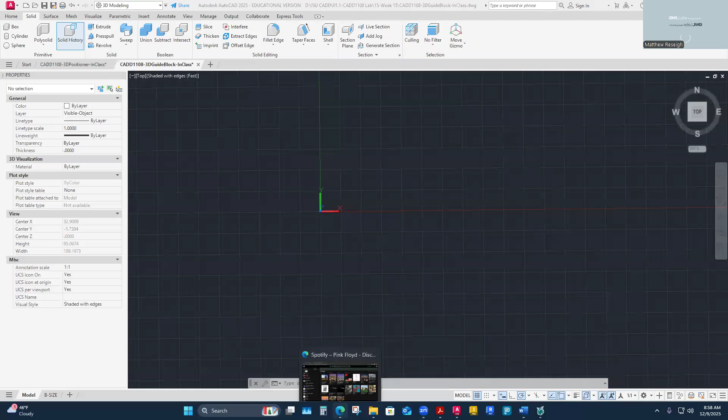I'll go to my dashboard, go to this assignment. Guide blocks, next one.

It's pretty much the same. I do think I'll do a front, top, and right side, and an isometric on this one. I'll lay this one down in its most stable part position, but there's an argument, I think I mentioned that yesterday. There are multiple selections you could do. I think you could kind of orient this one how we did that last block, the positioner.

Let me open my file, let me just open the file that we're working from here.

Yeah, the original way I drew this was I placed this down as the base, as my bottom surface, a nice flat surface. But it doesn't make a very detailed front view though. Everything's kind of hidden in the front view actually. All I'm going to see is this surface.

So there's an argument that maybe I'll change my role here. Maybe, but I think that's how I talked through I was going to do it, and I did it like that last year. But I think based off the way I did that last part, yeah, I would actually have better

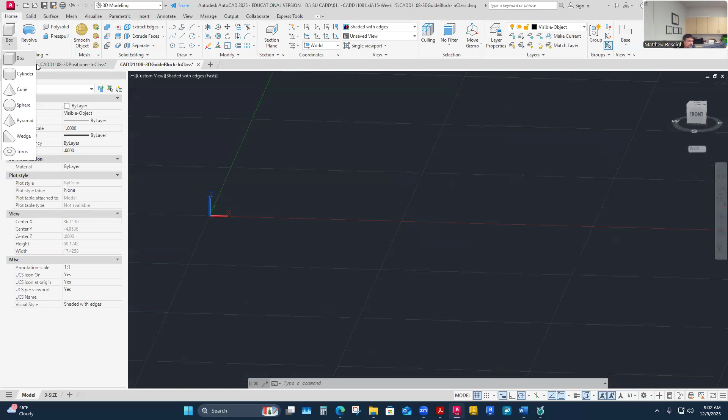I think I can start with that and then do some cutting shapes, but like I said, I think I'm going to do this one that's like 3 inches this way, and then the narrow way this way, I'll zoom in here a little bit, 0.78. Then the height of this block is 1.75, 1 and 3/4.

I'm changing the orientation, yes. For sure the orientation they give you, it's laying down on, like it's probably a stable part position for sure, but maybe it buries everything. It buries that slot kind of. It's stable, but this one's better defined. To me, it just kind of matches that last block I just did in some ways.

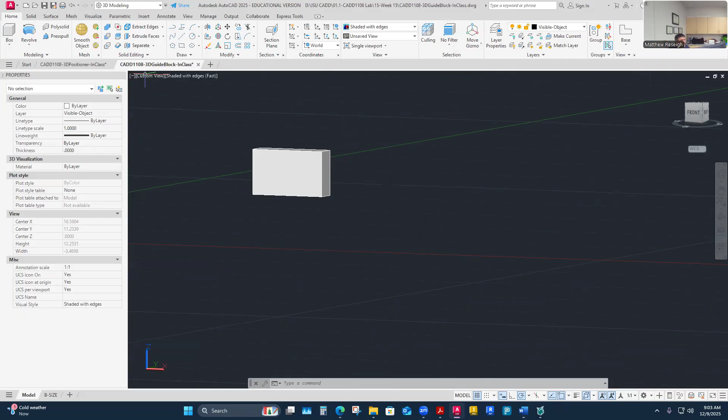Can you do that again? That is not how I thought it was. I'm going to do it. So I would. Well, it's okay if you did. And so, because I think I talked through a different way.

So the other way I was going to do it, I think I talked about yesterday, either one, I'll draw it both ways. How about that? And then you can pick which one you want in your drawing.

But the other way you could draw this is laying it down, so that it's still 3 that way, and then 1.75 this way, and then we have this little thing that's only 0.78 like this. This is going to be my front view. It's not going to be a very defined front view. It'll have the holes and the slot hidden in this view of front, but it'll be a very stable part position.

You'll have our holes here, we'll have the little U channel cut right here. So your front view doesn't show very good definition, but it's super part stable. And I think it's a totally fine way. It's the way I drew it last year, this way.

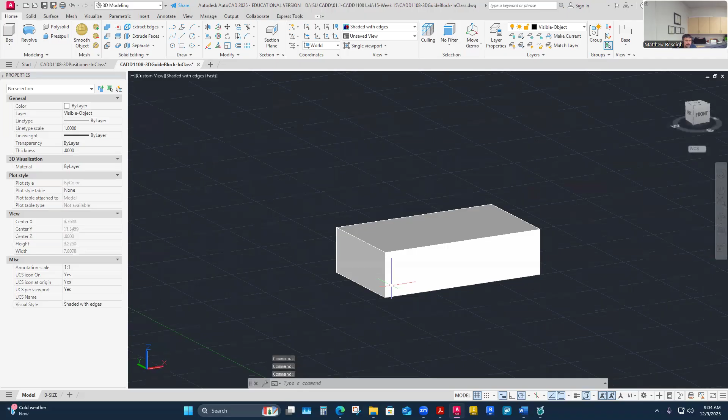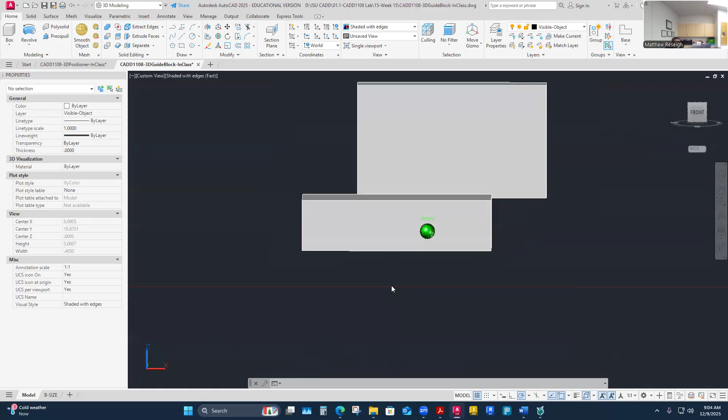I think I would say the best two options though would be this for a front view, or this one for a front view.

And I do generally try to avoid, for the most part, any narrow width front views, because you'd have this really long top view kind of. It's not bad, I mean, it's just you condense your views a little bit. If this is going to be your top view, this is going to be front and top, maybe a little bit more compact view than front and top.

I think drafters would greatly debate this for a while. If you know how the part's going to be inspected, and if it's an inspectable part, then maybe this is the better part position, flat.

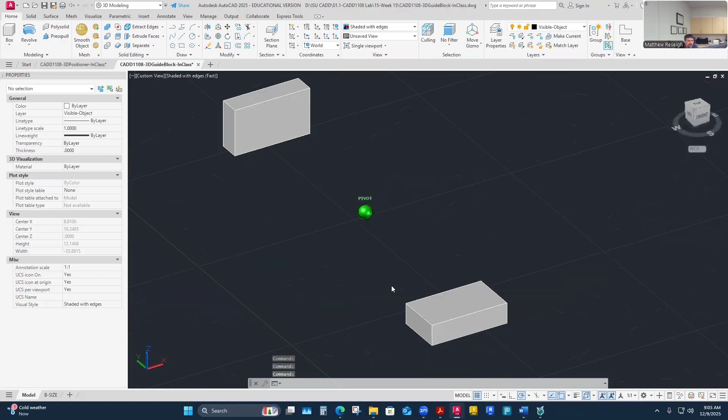But in that other drawing we have here, that would make, if I'm looking at this one, the same thing could be said. But this one shows the best part detail, has the longest width as well. However, it'd be more stable if it laid down on this side. It won't let me rotate that way.

It's really weird. If I laid it down like this though, maybe, so you could make an argument this would have been the better front view. It has some part detail, super part stable, and yeah.

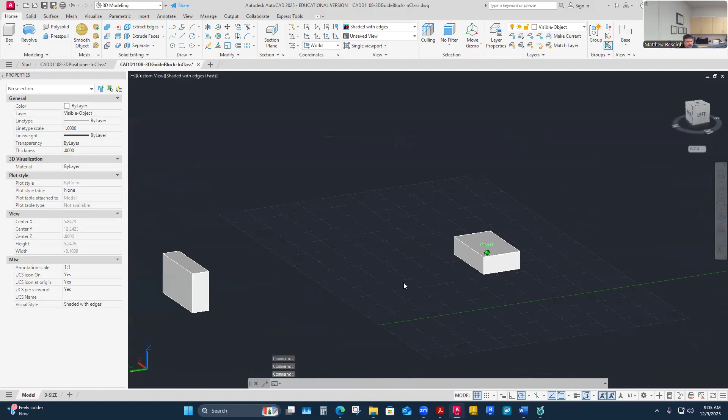So the reason why I'm kind of changing mine is because I drew this one this way. So I'm like, well, maybe I'll consider that concept here, and maybe I'll draw this one that way. Let's spin around. I'm okay with either one though.

Yeah, the biggest thing I'm kind of watching is that this is going to be my front view here, this front view cube. So that's going to be the view that comes in when I go to send this to paper space. It's going to be driven by this being the front.

When we initially place that part on our drawing, we have an orientation where we can change that, so it's not the end of the world, I can always change it later. I can even reorient the UCS in the model space like this. I could move this to be what I want it to be and lock it in on a corner, and I haven't really shown that yet.

It maybe gets a little confusing. Maybe when we get back into GD&T, we'll talk about that.

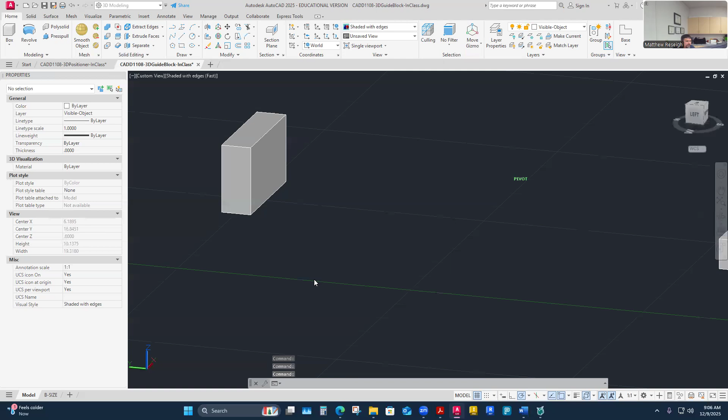But either way, what I want to do is, so I'm going to do this way. If you do this way, it's fine, it's going to be the same features I got to put in this thing. I'm just going to draw the cut that comes through here, and I'll just draw it on this end here. I'll draw it as construction.

So maybe I'll just do a construction line first, up to where I need to go. It's like a half inch up on my drawing, I'm looking at how that's going to be a half inch. And then this width here is going to be 0.75. Don't worry about this nominal size.

There's RC4, hopefully that comes back. But hey, RC-4, something to do with tolerances there, that's the type of class of fit it is, it's an RC-4 class of fit. We don't have to worry about that on this particular one, I'm just going to worry about dimensions only on this, so you don't have to include this either. So I'll just go a half inch and then 3/4, and then it's 375, 372. Oh, they threw a fractional dimension there.

This fraction does not look correct to me, right? That's like an improper fraction. Oh, maybe give the dimension. Oh yeah, it is, it's a limit dimension. You're right, but generally limit dimensions don't have a fraction bar between them. They're just two dimensions, so that's kind of misleading there. I kind of forgot that it has that on it, but you're right, it is a limit dimension. I'll go to just 375. It's nice, it's a 3/8 dimension.

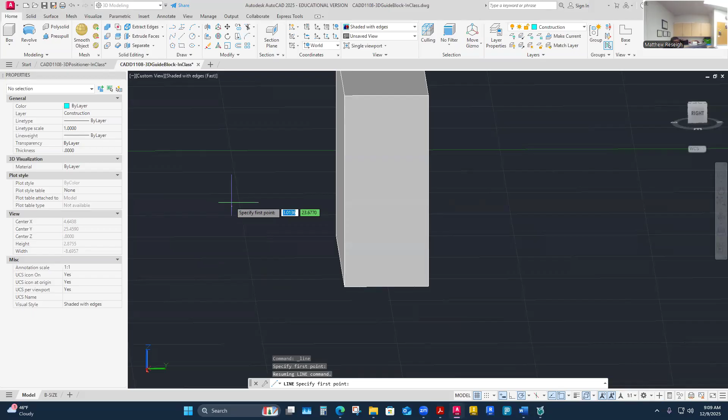I'm just going to do my slot cut this way, so I'm going to come up here like a half inch from this. I got to reference the right... or not necessarily, maybe this is correct, 0.5. Yeah, I got to reference the right face if I'm going to draw this way, right? I got to reference the face, lock into a point, make sure I get the same.

I am on the wrong face. I got to spin that thing out of my way. There we go, I just hid that face so I could get to the right face. Yes, draw up 0.5, that's 0.5 up. And then I'm going to come over this way, 0.375.

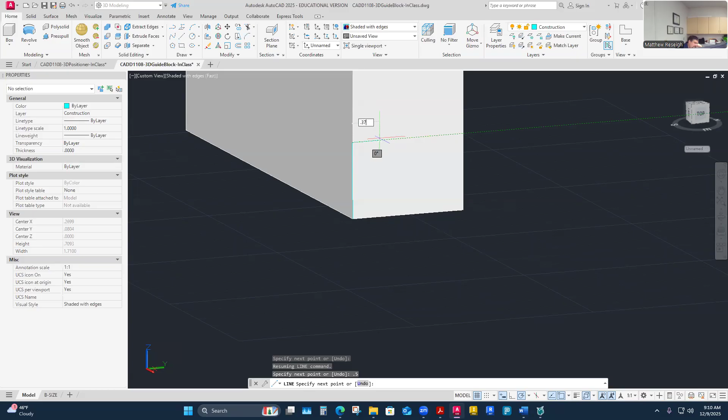And then they're 3/4 of an inch deep, and back to here perpendicular. And then I'm going to close this shape off so I can use it as a cut. Enter, so now I've got that shape. That's not all joined, I think I can still select it as a press pull with just the pieces. Let me try this, I'm going to try to press pull this and cut it through.

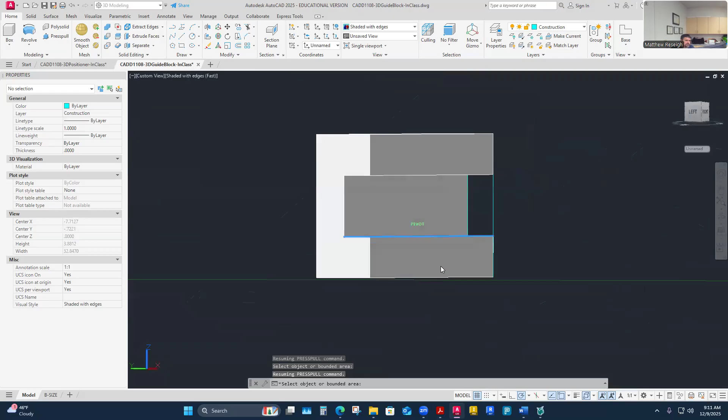It wants to know which... oh yeah, it'll select that one as maybe a boundary. Is that the only one? Yeah, it will, that's good. Even that, I didn't use polyline there, I think I just used line, but it still will recognize that shape as pulling through here. And then I'm probably going to enter a dimension, which is the 3 inch, and then I cut it out. If yours added a solid, that's okay, just do the subtraction.

And then I just got to cut two circles, right? So I'm just going to lay those out probably from the back side here, from this surface. Let me see what those dimensions are. 3/4 of an inch over. And is that centered? I think that's centered then, because it'll be 3/4 inch off each side. 1.5 inches between 3/4 and 3/4 would be 1.5 inches. So this is, yep, these are kind of centered that way.

And then this direction, are they even labeled? They were centered, yes. You'd have to call your engineer and be like, hey, are these centered? Right, right. Yeah, that's true.

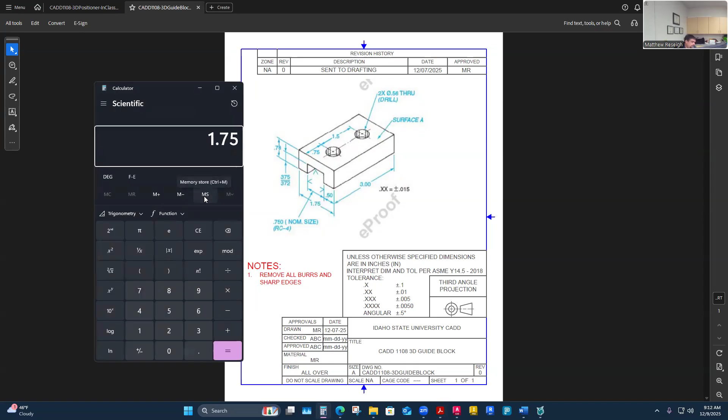I'm gonna assume they're centered too, so that's centered in 1 3/4. That's a half plus 3/8. Is that 7/8? Yeah, 0.875. Half of 1 3/4, when in doubt use your calculator, right? 7/8, 875. Okay, so it doesn't matter which end I come in on my block necessarily.

It's not specific, I can come in this way or this other way. I think I'm just gonna lay out some more lines from this surface though. Yeah, I strategically like roll this around. If I'm going to reference this surface and this other one keeps coming up when I go to here, maybe I'm just going to get it out of my view.

So what are we going up? 7/8, 0.875. I'm just going to draw a line first, 0.75 over, and then another line that's going to be 1.5 over.

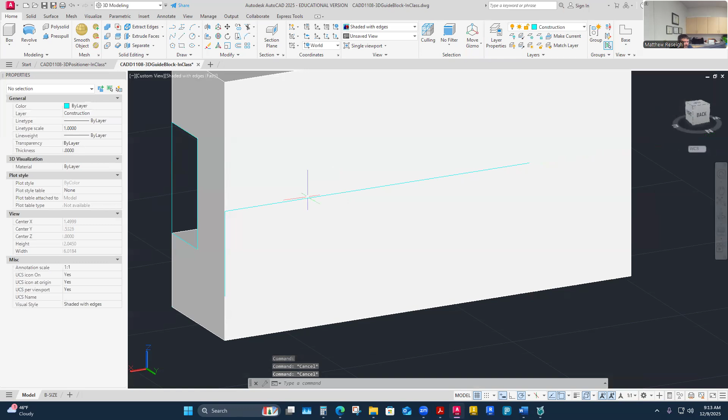So I should have endpoints of those lines now. I've got two segments on this line. This can be hard to see, so I can go over to wireframe and see my individual lines. Yeah, that should have an endpoint, and this one should have an endpoint too. I think I drew them not as polylines, but they'll still have an endpoint there to put a circle through. And the diameter of that, I didn't look, is 0.56 diameter.

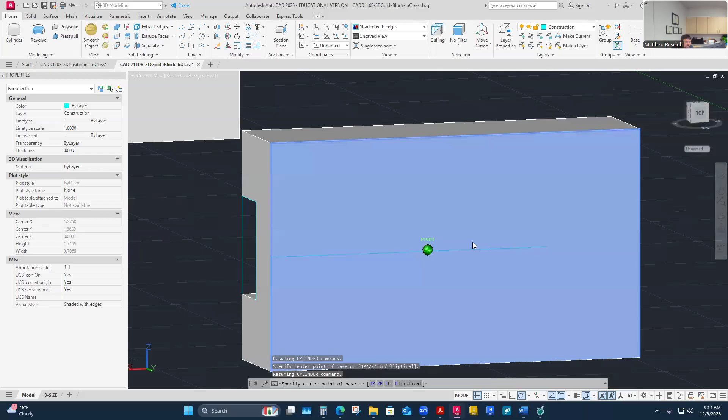You could do a cylinder shape because you have a center point. It wants to know where the center is. I should have a center point on this line somewhere, maybe if I have a grip. Maybe not so good on that. Right there, I think I saw it. Probably gonna be easier to see in this though.

I don't know if I'm going to do cylinder. That should be a solid - this is the difference. I think this will be a solid if I use this center from this. There's my endpoint there, and it wants to know the diameter, which we said is 0.56. Oh, this is radius, right? So 0.56 divided by 2, or we can go diameter. Let's just do that - diameter, yes. 0.56.

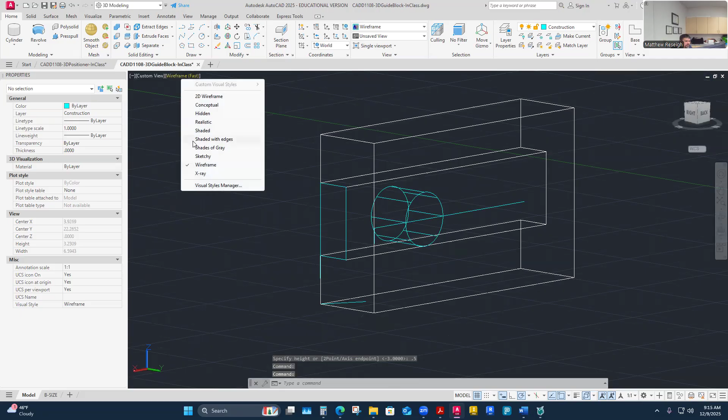And how deep does it need to go? I don't know, it's going to be a cut. This is one that you could cut through. You could look here and say, oh, I'll just cut it a little bit long. If I cut it a half inch thick, it will cut through long like this. But I think this is going to be a solid, let me look. Yeah, for sure these are going to add solids, which is not a problem, right? Just remember you can subtract this one, enter, from this one.

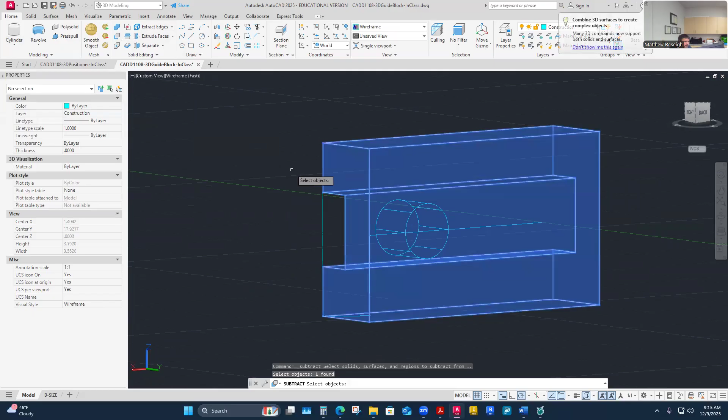Oh, maybe I didn't get it. This could be a little tricky too. I get it on my wireframe. I'm going to subtract this one from this one. Now I've got to cut through there.

And I'll do my other one the other way, which might be just to draw the shape there on that. So if I just draw a circle shape, circle by this endpoint here - or I could have moved that over before I did it, I guess. There's a lot of things I could have done different. There's that one, here's my circle shape on that surface. Diameter, yeah, 0.56. And then I can press pull that shape through this way.

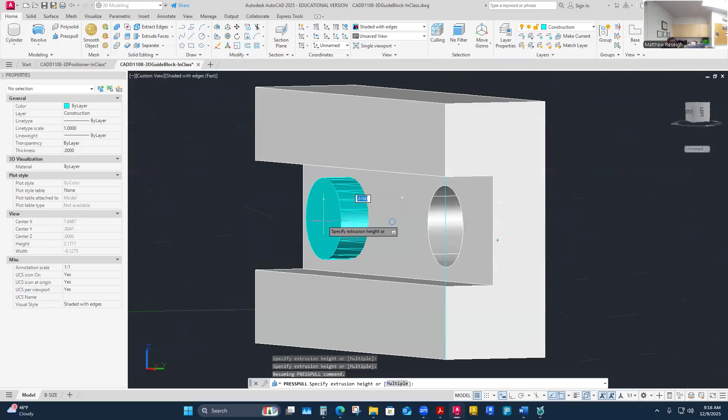Oh, I can go the same distance, 0.5. That should be a cut through. So, done deal. Doesn't have any chamfers or anything - no, I don't think so. And let's dimension that thing out.

So then I'm going to go over to my visible object layer so I don't put it on the wrong layer. I can turn off my construction work. Okay, and place that base view from model space.

I was going to show you this - I have two objects in here, so let me just show you the difference. I generally am going to place them from model space, because if you're on your paper space and you use that same command, you have the same home tab, and you place this from model space, it brings in everything you have here, right? So it brings in the entire model space into the paper space.

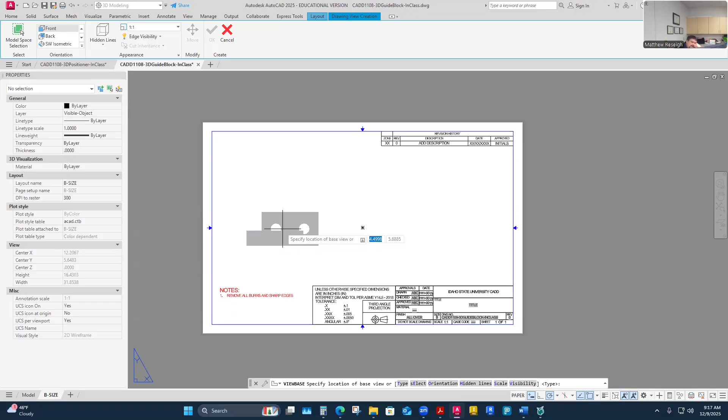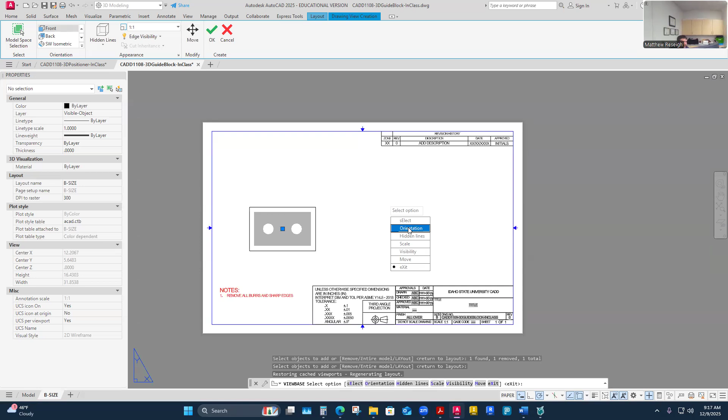Did you go to wireframe? It'll be hard to select some of those solids that are overlapping each other so close. It's one of the reasons why sometimes maybe I'll draw it not on the exact surface, but off the surface a little bit - but I didn't, I drew it right on the surface. But yeah, wireframe is your friend because it'll get into those particular line segments.

I feel like I'm using a shaded view and a wireframe view quite a bit, toggling back and forth between them, just because I can't tell if it cut it or not here. I mean, I think if I used it enough to know, I think I could tell that it is cut, but the only problem with wire view is sometimes you can't tell if you've cut or left or not.

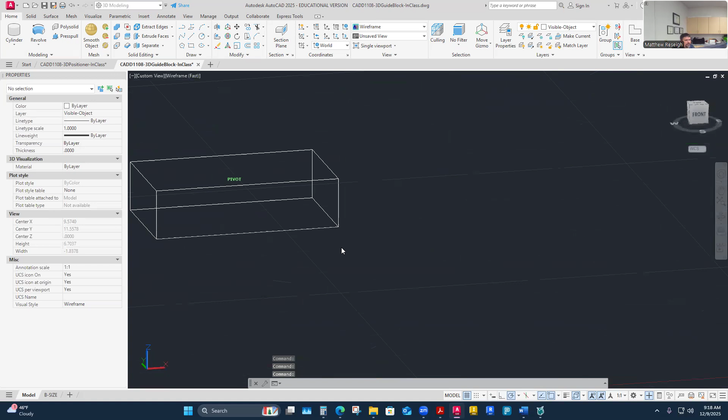So let me see. I'll try to do another cut of these ones if I go back to my shaded with edges.

So did you do a drawing, or are you using the box commands, the solid commands, or are you doing a drawing and a press pull?

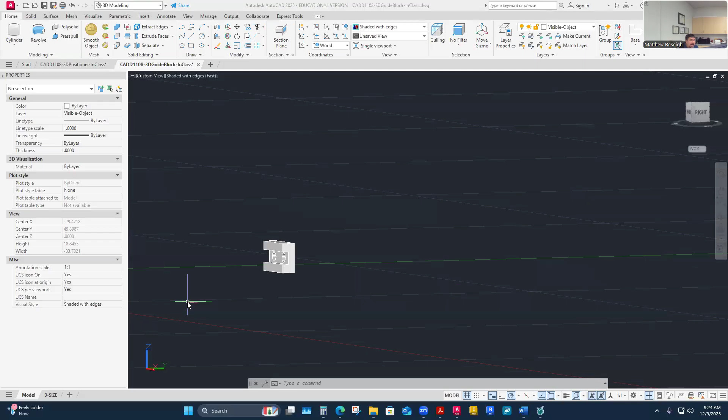Let me resume my recording here. There could be a reason to make a layer to add these to your layout, but what I'm showing you is there's multiple ways to add this to your layout.

So I have nothing on my layout, deleted my viewport, and this is the way I usually add mine to my layout: I come in here and say I'm ready to add something to model space. Even if I have a bunch of stuff here, I just say base view from model space.

It always wants you to select those objects. So in this case, if you had multiple objects like I do, I'm just going to select this one that I want to put on my drawing. And then I hit enter.

Then it's going to say, which drawing sheet do you want? This only really applies if you have multiple drawing sheets, and if you use the arrow keys, you can toggle between which drawing sheet you want to put this on. I'm going to put it on my B size sheet, which is by default what's loading in my cursor anyway. Once I hit that, it just jumps to that sheet and gives me control of this object.

And then it wants you to know this is your parent view, this is your base view. It's also going to come in as the front view. So I kind of selectively chose my front view when I built my object, so it's built in this orientation. There was a little bit of pre-planning.

Oh yeah, it's gonna take a minute to do that. Yeah, you gotta let that load. First time you're using it every day, it's gonna make you do that.

No, because I'll just show a couple more things. This is the way - you just click once, left click to set it, and you get this. You always get this once you set the first view, and this is when you get the orientation change.

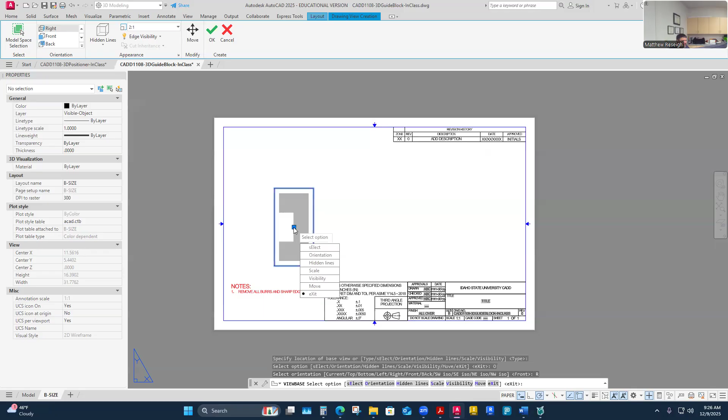Yeah. What am I doing? Just this - I'm just placing this from model space. And I'm hitting enter, and I'm choosing the sheet, which my sheet is just only one. I just hit enter and it goes to that sheet.

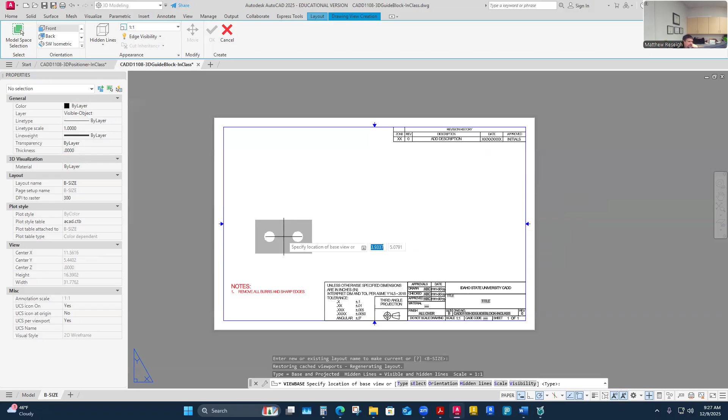And then I just left click. The first thing they want you to do is just place where the parent view is going to go. Mine's going to be kind of the traditional front, top, right side view. It's just that when you get this, this is where you have some control over that orientation to change.

If you don't like how that looks, then maybe pick a different orientation here, which you have your rights and your lefts. You could place it on the bottom, or you could place it on the top here. Sorry, select that one - orientation. But the one that I want is my front, because I drew mine in the front view.

The only thing you can never really get back to is the orientation on the parent view, I think. The rest you can always get back to. So if you don't have the scale right now or the line types correct, we can come back to this. This is just editing the view later, and to me, it doesn't matter too much.

You can hit exit, and then it goes into placing those other views. So I don't know, with this orientation, I probably can just get away with a front and right side view, honestly. If I do the other orientation where this was my front, then I probably do need to place the top to define the slot details.

Here, I think I'm okay. I just need the isometric view as well here, like this. I'm just left clicking these, and that's just placing them. And then when I'm done placing views, I just hit enter, and then they're going to show up. I think default's going to be show the visible and hidden lines.

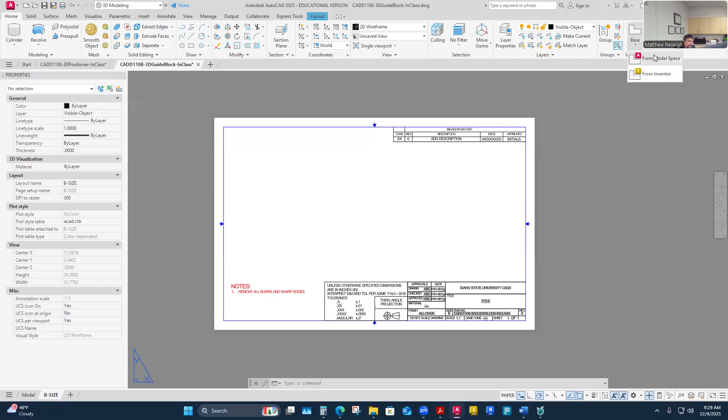If you place these views while on the drawing sheet and use that base view setting, by default it's going to bring in everything that you've modeled in model space, which if you've only modeled one thing, it's not the end of the world - you can just bring it in then. But if you have multiple things modeled over there, it's going to bring them all in, everything, kind of in that same view style.

Once I place that view, I can go to select and jump back out. And you can see that by default it's selected, and if I would have had a bunch more drawn, it would have selected everything. So I'm just going to hold down shift and select this - that's how you deselect stuff from a selection. Hold down shift, select.

And then I just hit enter and it will be only that one object now. Even if you go the other way, you always have the select menu up, so you can always choose to - even if you didn't get everything selected right to detail how you want to do it - you could hit any of these views. Select is another option that you can always get back into, and you could reselect stuff that you did want to detail on your drawing.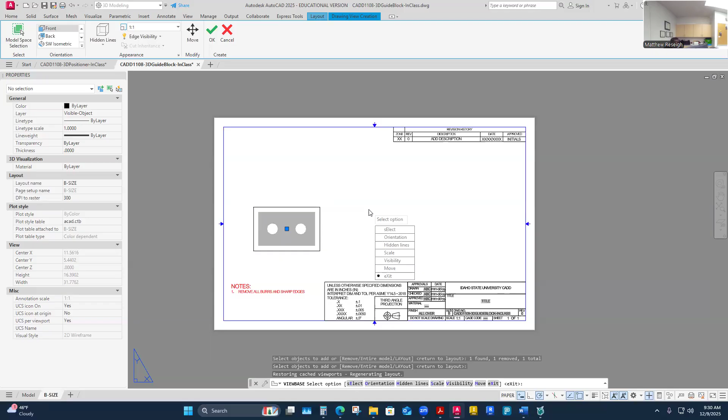I know that's confusing because we generally have one part in model space, but in reality, you might have multiple parts in model space working together, kind of building an assembly, maybe, which is what I'd like to do. If I added another week of learning to 3D, we'd maybe start making an assembly, but probably not this time around.

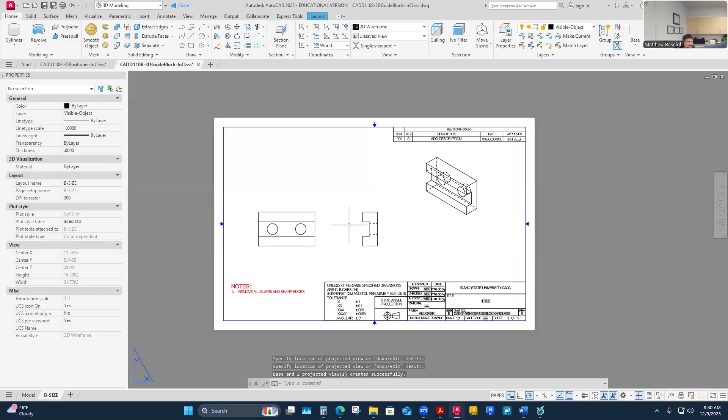So I'm just going to say exit this. I just need to place my other views, which I think I decided with my orientation that I chose, I'm able to get away with these three views, I think, and I'm just going to detail these ones out. So I'm kind of back to where I was, only I came at it from another direction, kind of.

I'm going to scale this. This is the parent scale, the first one you draw, or the parent view - it's the first one I dropped. So I'm going to edit it. Whether you get it to here, I right click sometimes and go here, edit my view. Brings up that same little thing here.

I'm going to adjust the scale for sure. This is at a 1 scale, maybe at a 2 scale. Well, 2 scale maybe a little bit big. I think I'll probably go to a 1.5 scale again, similar to the positioner that I did. Something like that I like. I might even leave that at a 1.5. I think that's fine with my room that I have.

I'm just going to edit my - I think I'm going to leave this. This is the way I want the visible or the - this is the lines that I want to show up in my orthographic views, visible and hidden lines. I want those to show there, so I'm okay with that.

So I feel like I can escape that once I've kind of scaled it up. And this one here, I don't want those hidden lines to show, so I'm going to kind of break that relationship by editing the view here as well. Edit view - I'm going to change that view from hidden lines to just show visible lines. Visible lines. And exit.

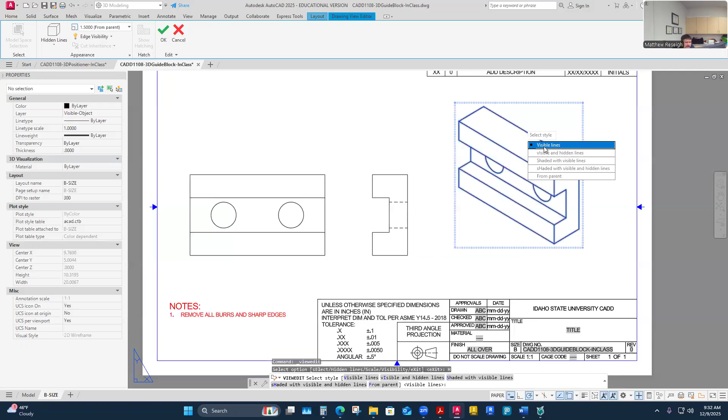If you're only sharing PDFs with your organization and never printing these to paper, you might work in places where they say you can shade your isometric views, which means choosing not just visible lines, but shaded with visible lines. Looks like this.

It might be less common, but some companies do shade some views if they're never printing them. Obviously, if I'm paying for toner, I don't want to print all that shaded and use up my ink. I think that's the primary argument against putting shaded stuff on your drawing - the ink and toner issue. You're going to cost a lot of money for nothing, especially since your other view that's just lines kind of shows it too.

But anyway, it's just shaded in itself - you can do your shading. Yeah, there is some shading going on here. Totally. Other than that, I'm just going to detail. So I don't care if you leave your isometrics like this, because even if we do print a few of them, it's not going to be the end of the world. Or you can just leave them as lines too.

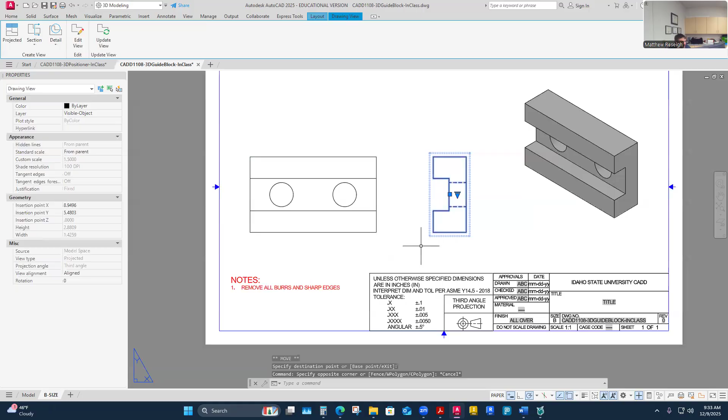But I do need to change my line types here again, right? It's going to have those same layers where I just have visible and hidden on this one. So I just need to make sure I'm going to change these again. I know this is kind of annoying. I probably could set this up, I probably could change the parameters, but...

For our simple views, yes, but for something I was really detailing, I would want to set up my space so these are coming in as I want them, not just default values. But really, this one only has a couple different line types - hidden, I put to 1.3, and then mostly I want to change the color of my hidden lines to green. But in all reality, it's the line weight that's probably more important than the line color.

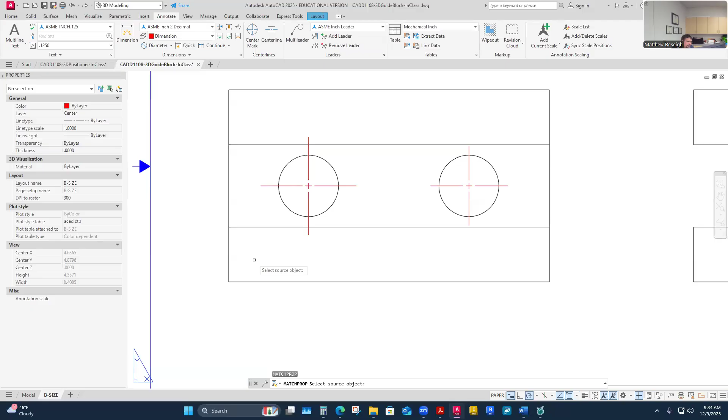And some center marks for sure. Heck yes, center mark, center mark. Maybe some center mark extensions. Maybe match properties - it's just an MA match prop coming up from this one to this one. And I do need a center line there too, right? Through this here. My center line?

I did. I changed this, my isometric view. Yeah, these are my orthographic views over here.

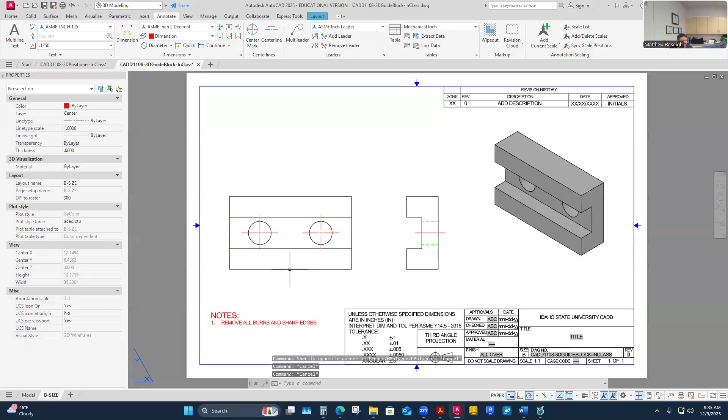You're about going to make me panic at the end of the semester. What? You call that an orthographic? No, I'm just, I say the wrong things all the time. We're going back to week one and we're starting over.

I think I've got those extended, right? Did I extend them? Sorry. What did I do that you didn't?

This is just so in the view - always, I select the view and I can go to edit view. It's going to bring up that little box somewhere - I don't know where, it always shows up somewhere you can barely see it because it's white. But it stays up while you're working on it. It is the hidden - it'll say, I don't know why it always says hidden lines here. It just seems like I wish it said what I'm on, but it doesn't.

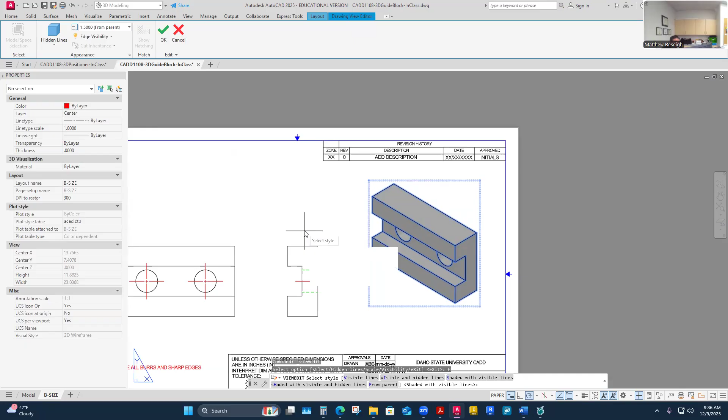It's kind of weird, but the one that says lines is kind of you have these options. So I selected hidden lines where it said, and then I've got visible lines, visible and hidden lines, shaded with visible lines, or shaded with visible and hidden lines. Or I can go from parent and just make the parent drive that style. Yeah, it's cool, actually. That's good, that's what we want to know.

And then I just need to dimension the heck out of this thing. So I'm really just ready to dimension. Maybe I'll dimension the width here, height here, the depth here.

Let's see how many I have that are not associated. Is it 1.17? Is that what my dimension is? Got my annotation. It's 7.8. Oh, 0.78 - yeah, it shows wrong and then it shows right, but then it's also got an issue. That's okay, leave it for a minute.

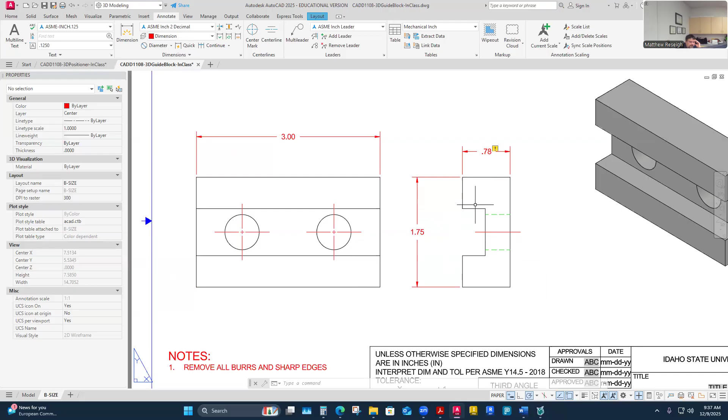I'll get my other dimensions in. I've got a feature, like a main slot feature here, so I just need to know its size and location. So I'm going to locate it from the base - that's how I'm going to do it from here. Locate up. Oh, I never did add that - I was going to add the degrees on the last drawing for a reference degree, but it's not totally necessary.

That one should be 0.75, I think. Oh no, it's coming right - it's just kind of funny, like applying the scale until it, yeah. That's kind of annoying though. That is kind of misleading until you drop the dimension - you're kind of afraid to drop it because it looks wrong.

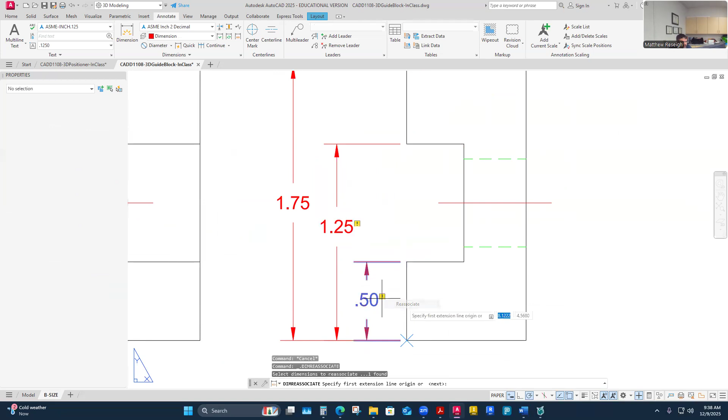When they're... yeah, see that one kind of goes funny, huh?

I'll leave it for a minute. I don't know which one's having my problem moving. That one actually moves pretty good that way. So it must be in the Y direction that's having trouble moving.

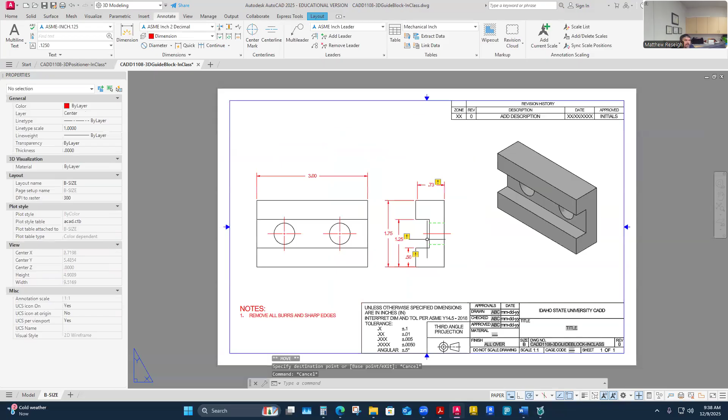Oh yeah, I should show you this. These are orthographically always aligned. You can break that though, I'm not going to do that. I don't want to break it, but there are ways to break the orthographic alignment between views. Let me see if I remember how to do this. I think it's just within the edit view panel.

Let me look at that for a minute. I do remember this, or I should know this. I should be able to break this. I'll look for this, I think I'm gonna have to do this on one of my views at some point. Break the relationship. Maybe I can't on these views, but I thought I could.

I'll come back to that. I'm pretty sure I can, let me just look it up. I just want to be... I know I can break these view relationships so they don't.

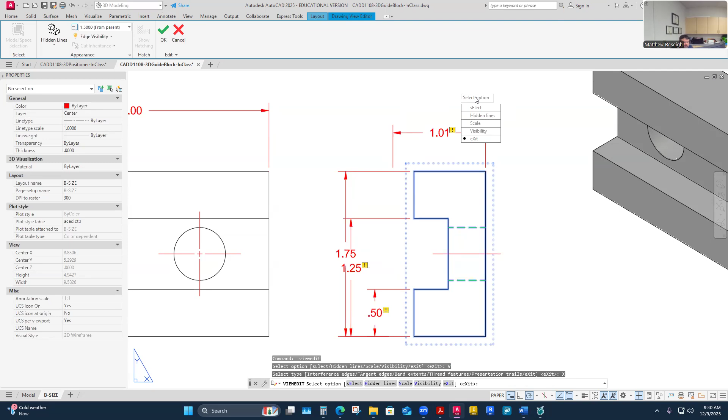I'll come back to that though. Maybe I'm thinking just my detail and my section views. I can break that for sure. I can on those, I can do removed details and removed section views. Maybe my main views I can't move them out of orthographic alignment. So I mean, there's not a reason, there's not a good reason why I should here anyway. But...

Okay, so I have that. I need to locate... um, this one is not helping me out, is it?

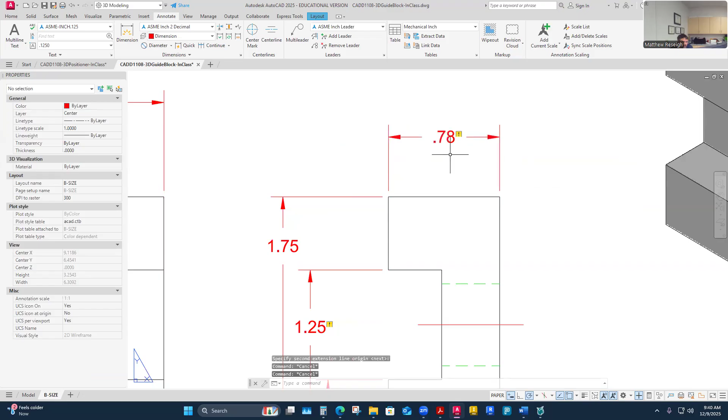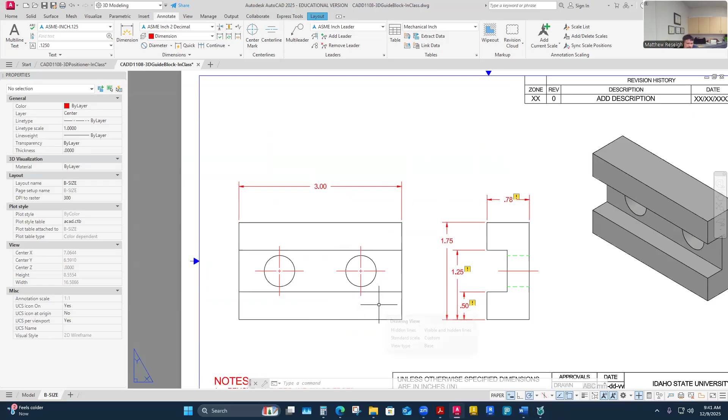Leave it, I think I have more issues here on this one. Let's see, but that is the correct dimension. That one, that one, I just need my width. Whether I consider, like, I would consider, oh, maybe my back surface is a better surface than my front surface has, because my front surface has two different surfaces that are associated with it. So it's kind of, I don't know, like I might consider that I like this dimension better.

Just because I'm pulling off the back to the location of that. I know that's a little bit weird, and that's not the dimensions that were given on that, but I'm kind of pulling from it. It just gets complicated when I have a front that has like these two separated kind of surfaces right here, and then if I'm dimensioning from them, so I chose to dimension from that solid back surface to that. I can put in reference dimensions that are cleaner, right? It's 3/4 or it's 3/8 this way. It looks a little cleaner, but...

Interesting. And one of the other reasons is, in GD&T, we are going to call this surface A. They are kind of saying this is a good control surface, is what this assignment is made for GD&T in some ways. And so they're kind of showing you that surface A is going to be this, going to maybe be our primary datum potentially. And that might be the reason to lay it down in the front view, but it still works as a back view or a back surface control here.

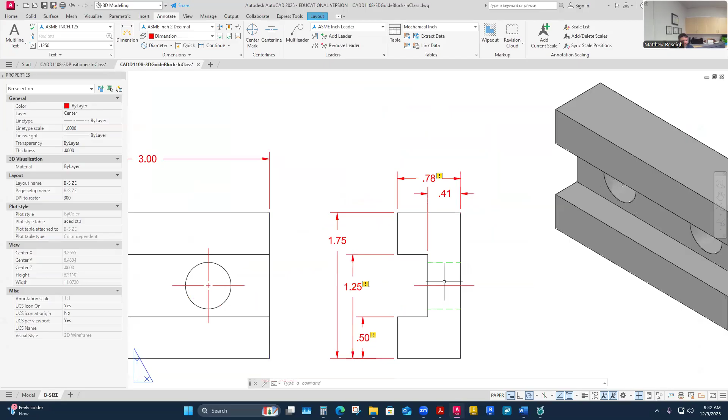To me, that's the location of that. I just need to locate size and locate my holes, right? And definitely this is when you're using, well first I'll size them. First size them, this one here I think I'll size. It'll be easier to place it. I'm going to modify it to and place 2 in front of it, right? 2x.

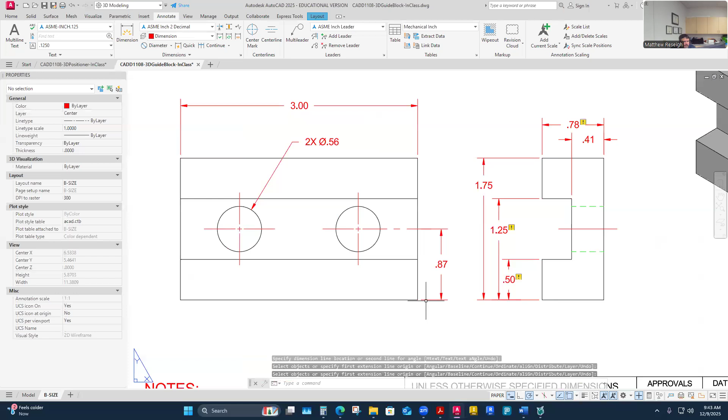I can get in there. 2x. I will locate them from the bottom. So this one's going to pull out for sure to the side here. And I can dimension this, right? From the bottom up. That might be the only dimension I get there. And then I want to dimension them in the other direction. So, I think I either have a right side or a left side that are good, both good surfaces to pull from. They're essentially the same.

Well, what if you just change the position? Well, oh yeah, yeah, because mine should be, yeah, because it should be, which way am I going though? You're just measuring. Oh yeah, yeah. Assuming it's on center, on point. Seven.

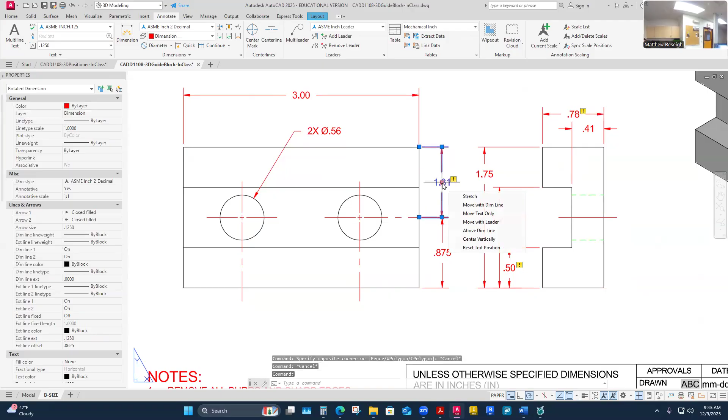Yes, it hasn't updated this four-dimensional part. These can all be true. Yeah, this can be, that can be a little bit tricky, huh? Yeah, that's funny that mine won't round down or round up, I mean.

And even 0.88 wouldn't necessarily be the right dimension technically, right? It's like, I gotta pull these other dimensions out and see how these are. This one should be from here to here, right? Should be 3/4.

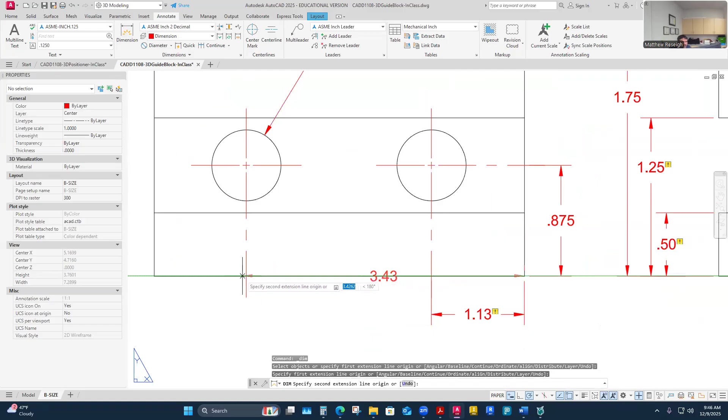That's not one, that one's not gonna come in right. Let me see this one to here. I'm gonna pull that one from the end here. Yeah, if I potentially drew my hole, 1.75. Oh wait, the better way.

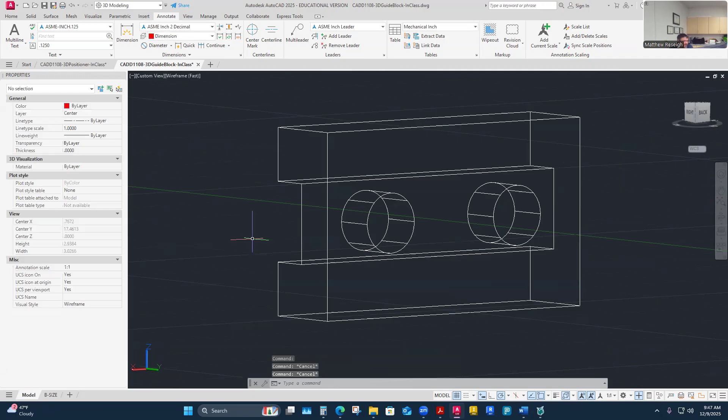Definitely true. Like if you have issues, that's kind of fun to troubleshoot actually, to see like how do I know how to do that maybe. That's a good question, it's a little less modifiable. I can't say I've had to make too many, that's interesting. To move this around could be kind of hard actually. Like maybe I would turn on my, if you did some construction work, I'd probably turn on my construction geometry.

So are you saying the dimension this way was wrong? Well, I'm right, yeah. Oh, when I went too far, should, because it should be 1.5, this one right here. So yours is 3/4 over to there. Oh yeah, so if I was to try to change that, I don't know. I'm just kind of interested in messing with this a little bit.

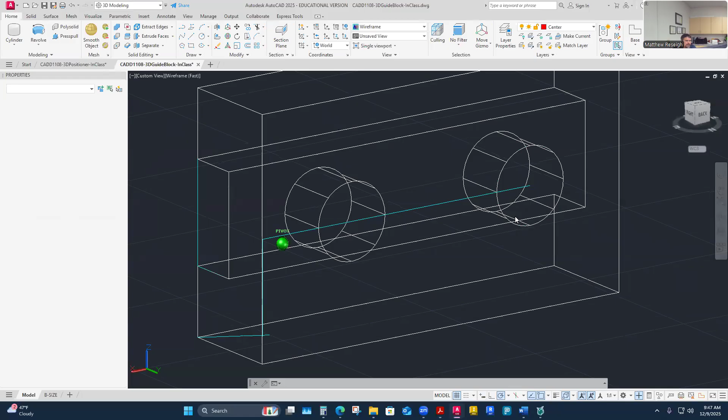Well, you could definitely add back in, right? We could add back in a solid for sure. I don't know, and I kind of wonder if mine, if I shorten this up, like I know technically maybe this line you drew is like a 1/4 inch too long. And if I was to move this, I don't think that's going to drive that shape though, because really I'd be moving back a 1/4 inch.

But see, the shape isn't really constrained to that, even though I used that geometry to locate it, it's not necessarily constrained to it. So yeah, I think in this case I probably would fill that back in. I just kind of want to know what that looks like when I do this myself here. And I can't say that's, um, yeah, I mean there might be an extrude faces option here to fill that back in.

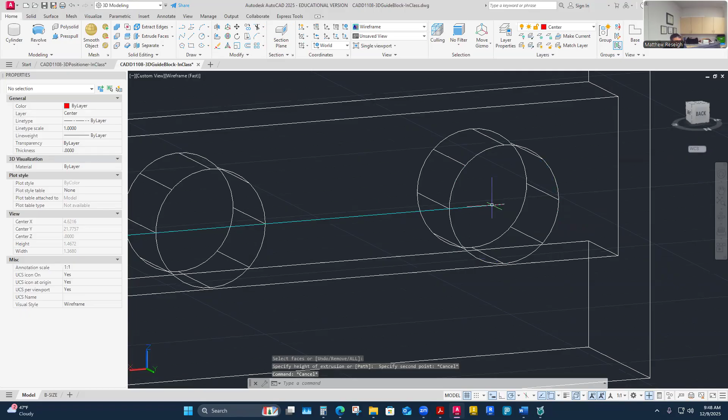I don't think extrude face is going to do that. It will select that face. Well, yeah, I might, let me just see what it would do, like if I fill this thing in here. Which surface am I on? This back surface here?

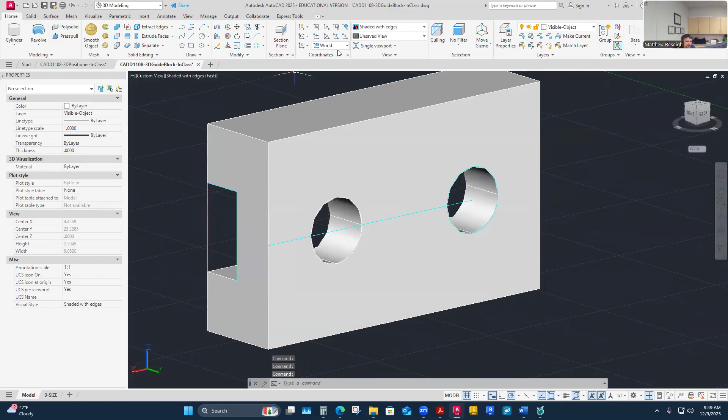I think we'd have to, I may have to fill that in and then redraw it. And this can be tricky to do too, like if you don't have a surface to reference to say what I will do to, and we haven't done this too much because I haven't had to troubleshoot too much yet. But if I've got to fill that in and redraw it somewhere, I think I might have to manipulate my grid a little bit.

Like I'm drawing pictorial drawings, I try to relate it to something like we know. This is definitely going to, if I don't reference a surface, it's going to reference off the grid plane that I'm showing here. So I can kind of manipulate that by this little drop down on the coordinates, it'll let me move the grid plane to different surfaces.

So I feel like I can choose a few different ones. Like there's a right side one - it's probably not the one I want to draw with. Would it be my left? No, probably not gonna be left. Would it be front? Yeah, like a front surface. That puts the grid plane along the surface that I want to extrude something from or build something from.

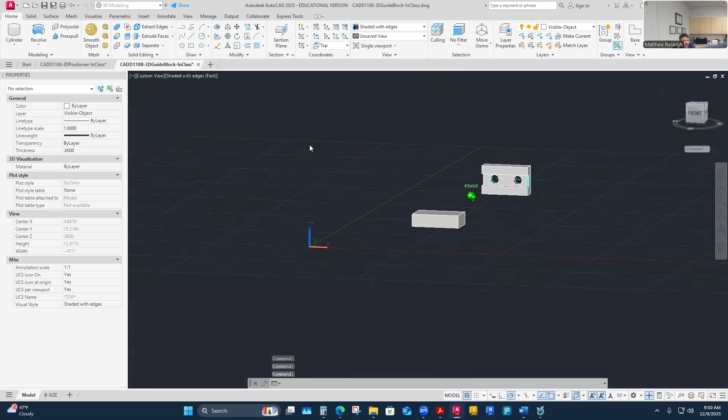The default one that I haven't even moved, we've been on the top plane forever. That's kind of why my shapes are lying how they are, because I'm on the top plane. But if I need to fill this in and can't reference a surface to draw from, I think I can move my coordinate plane here.

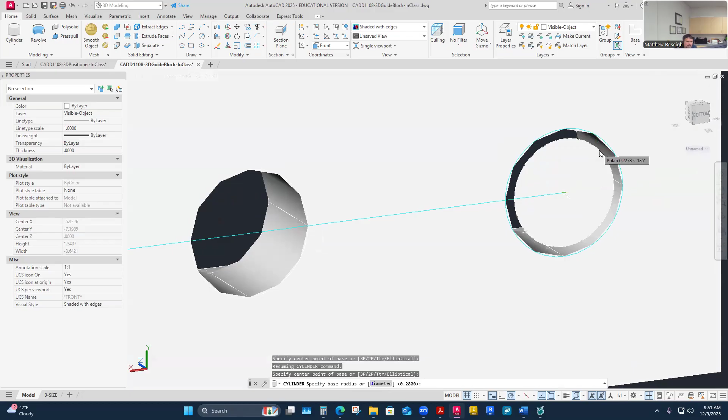I chose mine to be front, and now my grid plane is kind of front. Then if I choose like a cylinder to fill this thing in, and I still have that as a center point, I have my construction work here, and that's going to now be on the right plane.

Were you able to do something, or did you just fill it in actually? I just filled mine in.

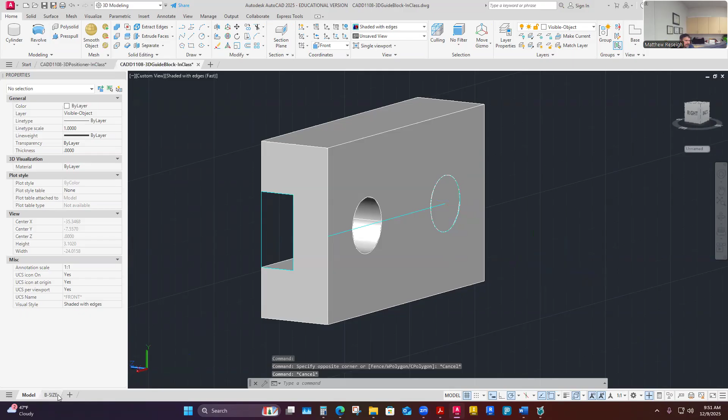Right here, join it. Yeah, because mine, now that I've filled mine in, probably on my sheet it's still gonna look like a separate solid essentially. Even though it's filled in, I almost can't tell on this drawing that it's a hole or a solid.

So you're saying once you filled it in, join these things or union them. Yeah, like that, select both of those. Now I probably come back here and I've lost everything. And I don't know why.

Oh, I think it's because - well, I don't know why actually. That's another issue, don't do that, whatever you did. Control Z, Control Z. I was trying to think if when I joined mine, if I happened to join it to a construction layer or not, but I think I'm still on the visible object layer.

Yeah, so that should show up right. I think it just might be that I've got to select - it does act like there's my view. I'm going to go into edit it and select this view.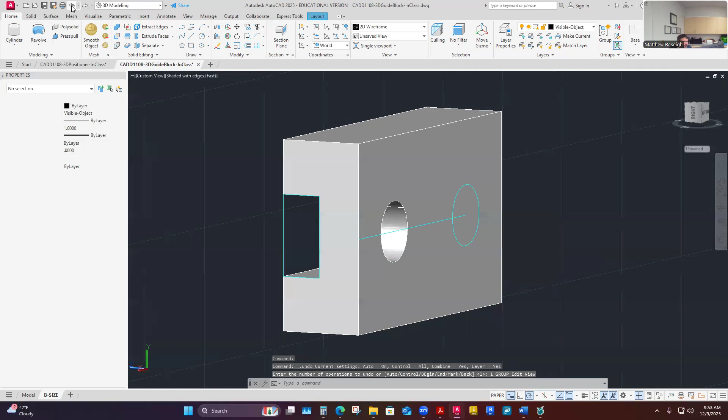Yeah, that is weird. I'm gonna go back a little bit, at least back to where I joined mine. There's mine before I joined.

Did that on the visible object layer, yes. So I should be able to union those, that to that. I do lose my - it's like once I do, I don't know if you lost this, but I did lose my dimensioning when that happens.

Yeah, did you lose everything here? It's like it's changed the shape, like it's lost its association, which I didn't know would actually necessarily happen. I like troubleshooting stuff like this though.

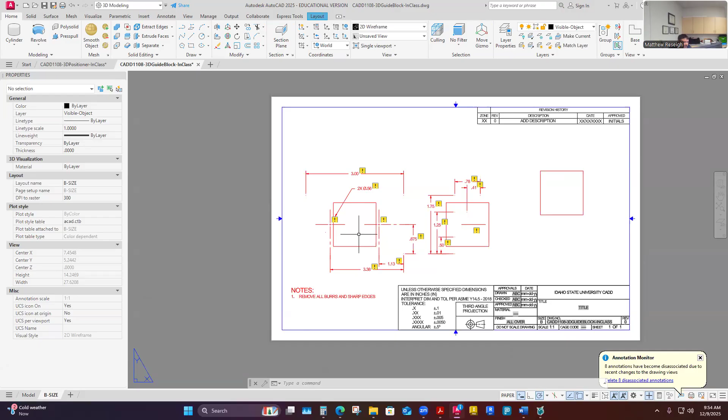So mine, I would have to redo all that potentially. I would think that I should be able to come into this view and it's almost like it's lost its selection. I need to go back in and be able to select it. It acts like I have a view here, but I can't get my selection view to show up, right? It's like select view.

Yeah. Gonna pull that in there. I think there's got to be a way that I can get back to where I was without redoing it.

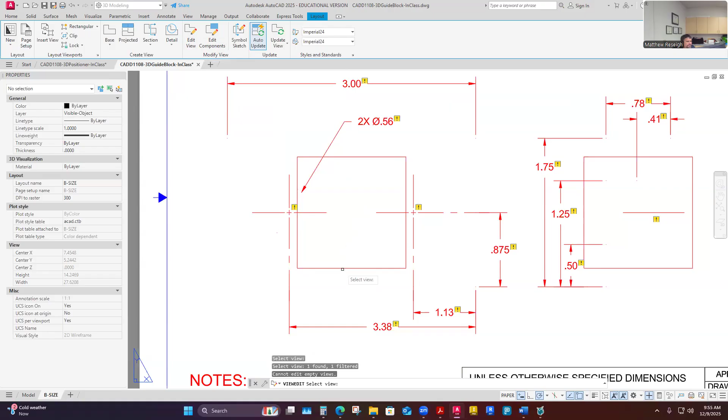So it's good in some ways and it's horrible in some ways actually. But it's mostly just me like, how do I edit that? I don't know, that's good. The moral of the story is don't ever make any mistakes. No, I'm just kidding, that shouldn't be the moral of the story. Mistakes are - you should be able to plan them, understand if I have.

Yeah, that kind of surprises me. I guess I've never had to try to do something like that. That's interesting. Okay, I will. I'll troubleshoot that this afternoon. That makes me think that there's a quick way, it's just a matter of me not knowing which way that is, I think.

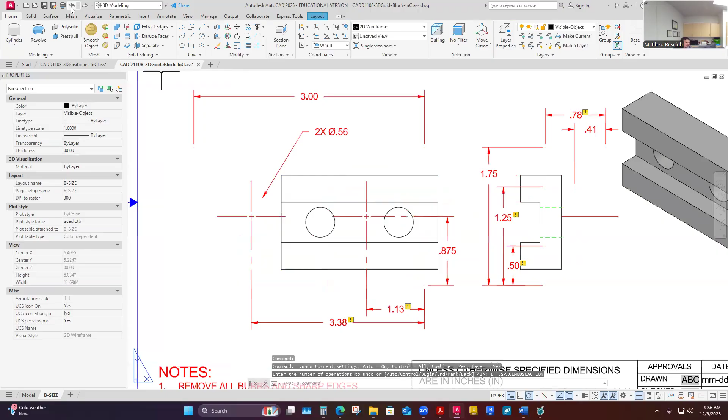Yeah, and that's a good argument. I'll cast back to you guys here so I can finish up mine, then I'll take a break and jump into the other one. Continue.

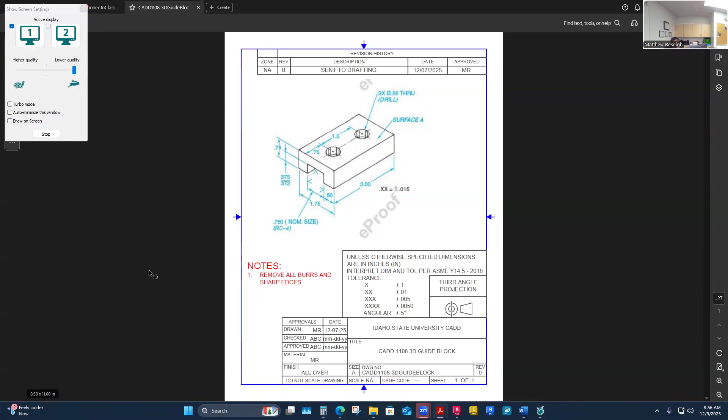I think we'll come back. I think I'll leave everything in mine at two decimal places, but you can't - I'm not going to be super critical on this, like what your dimensioning is. I think I'll leave mine at two decimal places. When I come into GD&T this thing later, maybe we'll adjust some of those.

So yeah, maybe we'll pull up that RC4 class of fit and make our tolerances match that. So yeah, that's good, I think I'll just leave mine.

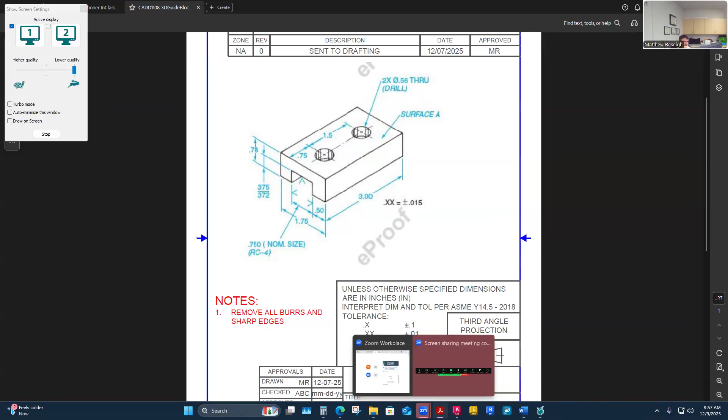But that's interesting. I'm gonna play around with that concept a little bit later and see. I should be able to reselect my views and modify a bunch of things, and have my sheet automatically update. So yeah, I've got a research project of my own now to do.

I don't think mine is even showing the right dimension for this, by the way. Like this should be 3/4, right? That should be 1 and a... Yeah, exactly. So mine definitely has some issues here.

Reassociate this to this. Part of it is just maybe the way I chose mine. I didn't choose the actual feature, so it had a weird dimension. I just reassociated mine to the actual feature, which is the hole. If I pull this down, it should stay the right dimension now. I have the same thing going on here, want to reassociate it to the actual hole, from here to here.

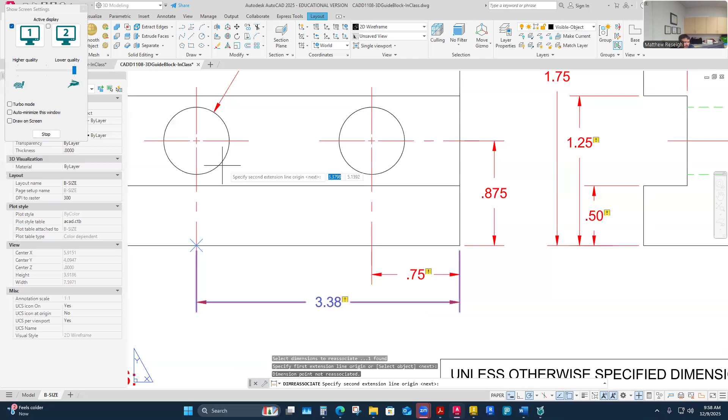I'm not so sure I'm getting that to reassociate the way I want it to. Back one more. There it is. Got the right dimension. I just need to pull my extension line back to the edge here.

Okay, and the other thing I want to do - remember to do this when you have one dimension driving one, but they're on the same linear plane. Just remember to pull these together. It simplifies your dimensioning and makes it explicit that those two are on the same centerline plane. That's one thing I bust a lot of people on in their drawings - yes, you have the dimensions right, but I want to show the uniform nature so that dimension can drive both locations. So watch for that with your center lines.

And then I just need to clean these up, but I think I'm pretty well located now. If the 1.5 inches is a more critical location, we can determine that - that's always based off if I know the parts' relationship more. So I might just do a line type adjustment here, or line type scales.

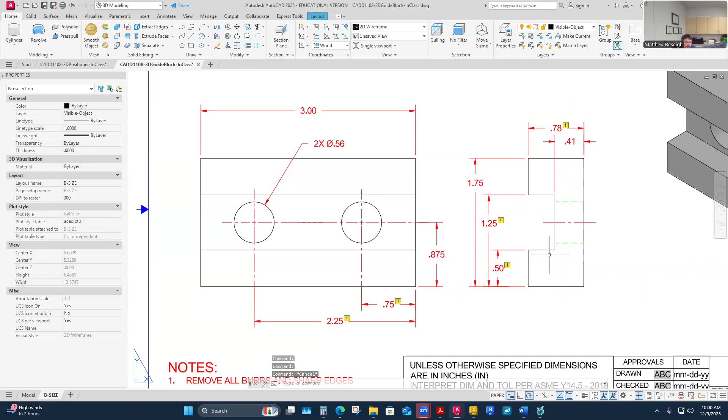Something a little bit that breaks this one up for sure. At least I see a break up there. That's good, I could go a little finer, but that'll be okay. I just need to adjust some spacings and call this one done.

And then the next model is pretty quick, I think. Might stagger this a little bit more. I love that though.

Oh, I did the wrong dimension. Sorry, back it up, back it up.

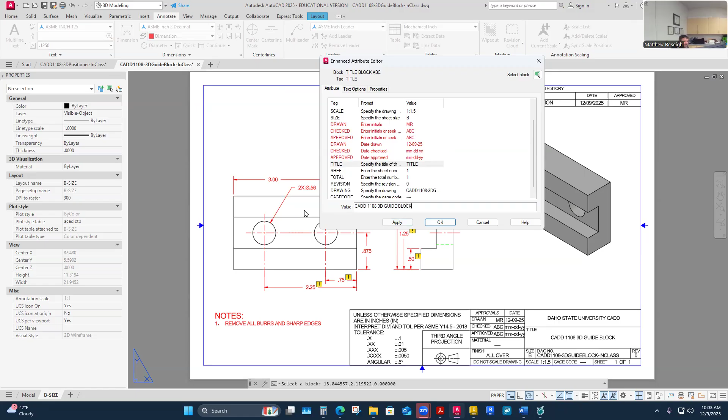This is, yeah, 1108, 3D guide block. The guy who bought it...

Yeah, these aren't too bad, but like I say, once my monitor - I just turn that monitor off and I feel like I rest in peace. You can't even leave it. My line types are doing good. Love it. That's crazy, that's such a weird feeling.

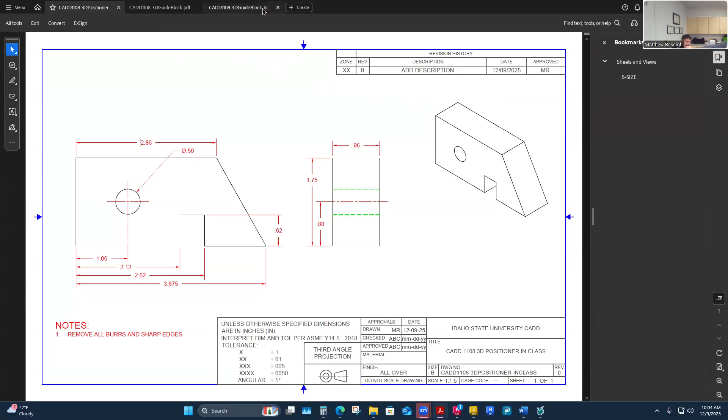All right. Yeah, I think I forgot to add a description there. Oh, I forgot to finish that. I'll come back and clean that up. Yeah, I'm gonna stop that. That's kind of a video that has a lot of not talking, and then a bunch of troubleshooting that did never go well.